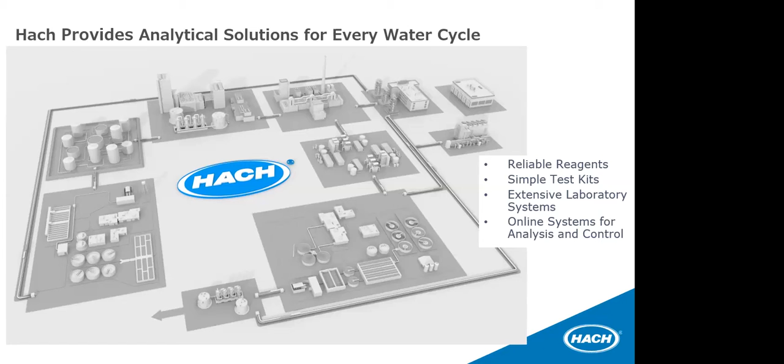A little background on Hach. Hach has been in business for well over 70 years, started by Clifford and Kitty Hach post-World War II, with very simple test kits that allowed anyone willing to read and follow instructions to reliably get accurate results in water quality measurement. Since then, Hach still has a huge line of test kits, as well as extensive laboratory systems and online systems for analysis and control. We work with really great distributors like Midland to help supply these products to our customers.

So we're talking about boiler water. The idea is scaling, and I show you a picture on the right of extreme scale. I think we've all seen examples of this at times. But anytime you start getting a buildup of scale in a system, you start getting a lot of problems with heat transfer, head losses, things like that. In extreme cases, you get complete failure. Basically, scale is the deposition of inorganic salts on boiler and heat exchanger surfaces, often like a calcium carbonate or calcium sulfate type scale forming.

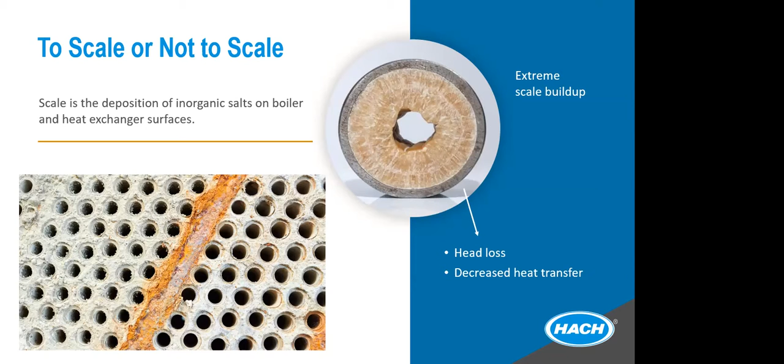Sometimes you get silicate-based scales. So the whole idea is how do you control that, because you're constantly bringing water into your boiler. It's always going to have a certain amount of dissolved solids to it, and as you heat that water and go through the cycles, you start cycling up the concentration of some of these dissolved solids. At some point, you start building up scale. So a lot of boiler management is really trying to reduce the effects of scaling, but also making sure you don't have corrosive conditions as well.

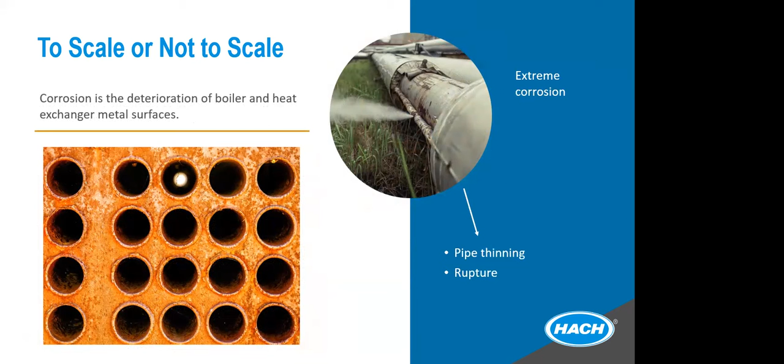So corrosion is the deterioration of the boiler and your heat exchanger metal surfaces. And extreme corrosion, as you get into higher pressure systems, can really be a dangerous thing. You get into pipe rupturing and all that. But by and large, corrosion can really start deteriorating your capital equipment and everything.

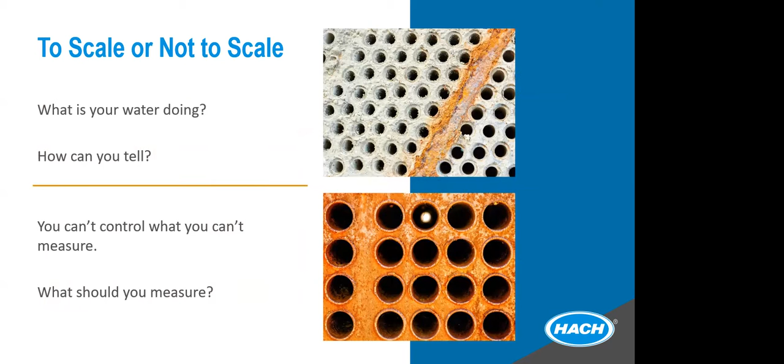So the question then is, what is your water quality? What is your water doing? And how can you tell? Well, basically, you can't really understand your water quality, and you can't control it unless you monitor it and measure it.

And to be able to do that, how do you do that measurement? What should you measure? Well, one of the biggest things we deal with in water quality, ubiquitous, is hardness and alkalinity. And those terms are somewhat ambiguous because they can mean different things at different times. But basically, from a standpoint of pure chemistry, hardness is the sum of the multivalent cations in solution. So if you looked at the total concentration of multivalent cations, with calcium and magnesium being far the most predominant, those are what are going to contribute to water hardness.

Alkalinity is basically the water solution's ability to neutralize acids. So in most natural waters that we deal with, by and large, a very high percentage of the alkalinity is bicarbonates, but it also can include carbonate and hydroxides. And then when you get into boiler water treatment, often we'll add phosphates, like trisodium phosphate, to enhance alkalinity.

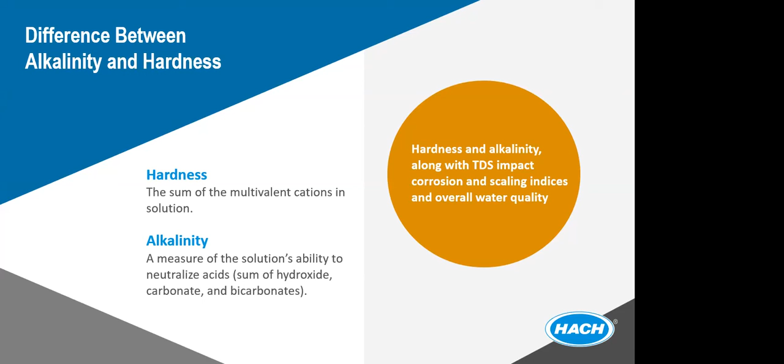But hardness and alkalinity, along with the TDS impact, total dissolved solids, will impact corrosion and your scaling indices and overall your water quality. So there are two things that are really, really closely watched in boiler systems.

Let's talk about hardness. As I mentioned, traditionally, hardness is the sum of calcium and magnesium in water. It also includes other multivalent cations, but by and large, a very high percentage in most waters is going to be calcium and magnesium. And largely, water is high in calcium and magnesium because when rain comes down from the sky, it's very pure. It hits the soils and dissolves the calcium and magnesium minerals in the soil, and they're dominant. They're more soluble than a lot of other things other than sodium chloride.

And so you start getting hardness building up in your water. We always express, pretty much in the industry, hardness as calcium carbonate. Even if it's magnesium or calcium, we express the result as milligrams per liter as calcium carbonate. We do that to get an idea of the equivalent hardness relative to the amount of alkalinity, which we also express in results of calcium carbonate.

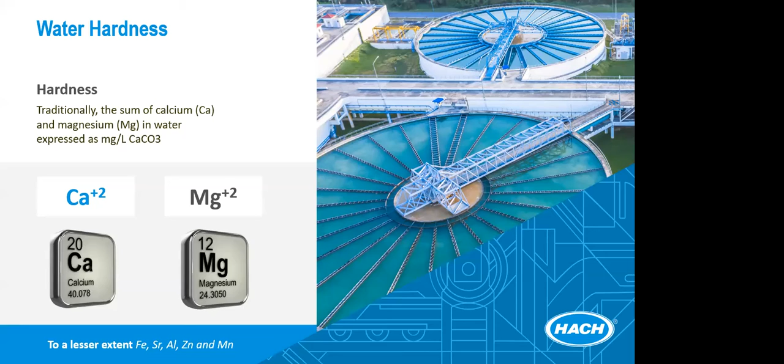Now, there's two types of hardness. And again, you need to understand why we get to this term here. There's temporary hardness, and this is hardness that results from carbonates and bicarbonates of calcium and magnesium. Permanent is what we call the non-carbonate calcium and magnesium. This would be calcium, magnesium sulfates, nitrates, and chlorides.

Now, this whole concept of temporary and permanent is really based upon an old method, and it's still a very viable method of reducing hardness, which we call lime softening. So in the case of lime softening for reduction of hardness, you basically will remove the calcium and magnesium carbonate-based hardness, but it will not remove your non-carbonate, like calcium and magnesium sulfates.

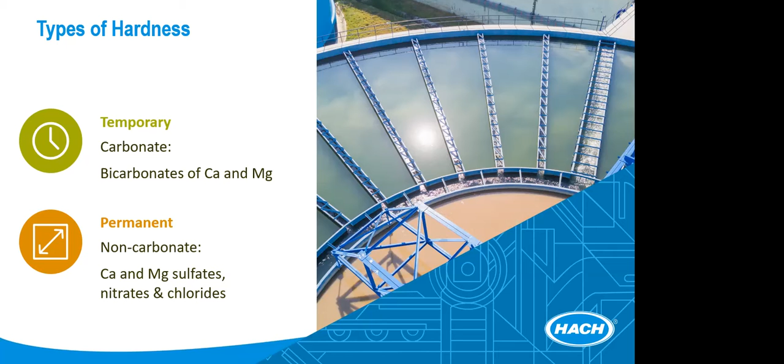That would require something like zeolite water softening, reverse osmosis, or demineralization. So the whole idea behind temporary hardness is that it can be removed with lime softening. Permanent hardness is that which would require other processes.

Levels of hardness really kind of depend on what you're talking about. The old general water hardness scale, and some places still do, measured hardness as grains per gallon. It takes 7,000 grains to make a pound; basically 1 grain, or 1 grain per gallon, is equivalent to 17 milligrams per liter.

So if you have a water that's measuring 100 parts per million as calcium carbonate, that would be considered moderately hard water. But again, that kind of depends upon a lot of things, because if you're in a situation where you have a very high pressure boiler, any hardness would be considered too hard for that type of situation. Medium pressure boilers or lower pressure, not so much.

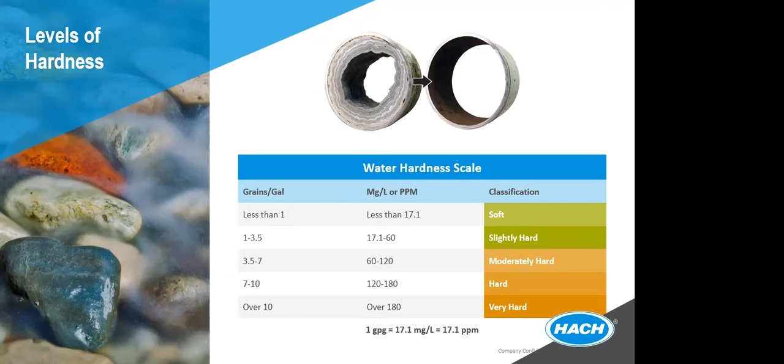So just understand that this water hardness scale is somewhat dependent upon how that water is going to be used.

Let's talk about alkalinity. Alkalinity is the capacity of the water to neutralize acids, often referred to as the buffering capacity. It really has to do largely with the presence of carbonate, bicarbonate, and hydroxide ions. In natural waters with pH in the slightly alkaline range, less than 8.5, pretty much all of that alkalinity is going to be bicarbonate.

But as you get into the more alkaline pHs, you can start getting a higher degree of carbonate because the hydrogen from the bicarbonate will dissociate off. And at pHs above 8.4 to 8.5, you also can start getting some presence of hydroxides. All of these together are considered to be the total alkalinity.

It's very important to have alkalinity in your water to counteract corrosion, but at the same time, understand that alkalinity along with your hardness can create scale. So there's a balance going on.

As I mentioned, in natural waters, the primary constituent of alkalinity is bicarbonate. But as the pH increases, the bicarbonate can dissociate to carbonate. And at higher pHs, you start getting the presence of the hydroxide ion. All of these will contribute to the total alkalinity.

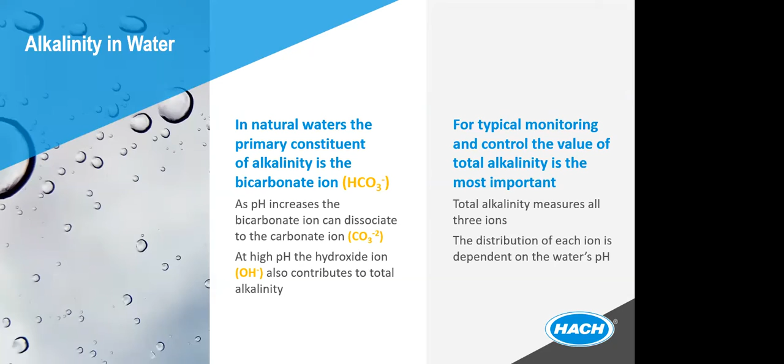So expressions of alkalinity are out there. We often look at M alkalinity, which is total. Essentially we take a water sample and add a normalized acid, usually sulfuric acid, until the pH reaches 4.5. At that point, the amount of titrant can be calculated back to the total alkalinity.

How do we know when we reach pH 4.5? It can be done with a pH probe in the water to show you the endpoint. There are also color indicators like bromocresol green or methyl red that would give you a rose-colored color at the point where you reach 4.5.

P alkalinity is the amount of acid it took to reduce the pH to 8.3. If you use phenolphthalein, it would go from pink to clear, and that would be your endpoint. Then your hydroxide free alkalinity, you look at 2 times your P alkalinity minus your total to help you calculate.

So based on your titrations, you can actually start speciating how much of your alkalinity is total versus P alkalinity, the hydroxide, and so forth.

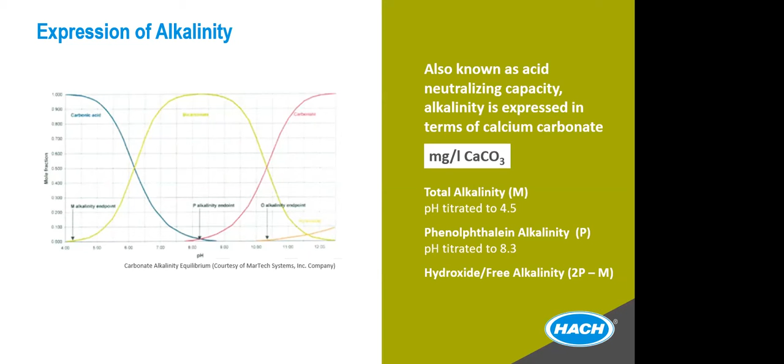I mentioned this earlier, and it really depends on your pressures or your boilers, how much hardness and alkalinity you can handle. For example, if you're dealing with a low pressure boiler, very often if your hardness is around 75 parts per million or less, that's probably going to be fairly tolerable. And the total alkalinity, you can handle alkalinity clear up to 900.

Now, if you're a power plant with supercritical pressures, you've got to be essentially zero in both of those. So again, hardness and alkalinity levels, and how you manage them, are really dependent often on boiler pressure. You have to understand what is an acceptable range based upon your water usage. High pressure boilers need very little to no alkalinity, while low pressure boilers would have a certain amount of hardness and alkalinity.

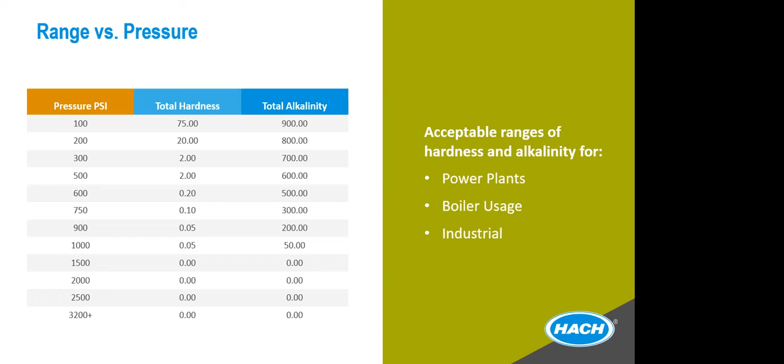So what do we do with hardness and alkalinity once we have the numbers? What can we predict? Well, there's long been what's known as the Langelier saturation index. The Langelier saturation index basically gives you an idea of whether or not your water has a tendency to either form scale in the boiler, be relatively balanced, or has a tendency to be corrosive. It's a combination of different measurements that includes hardness and alkalinity, but also includes temperature, total dissolved solids measured as conductivity, and pH.

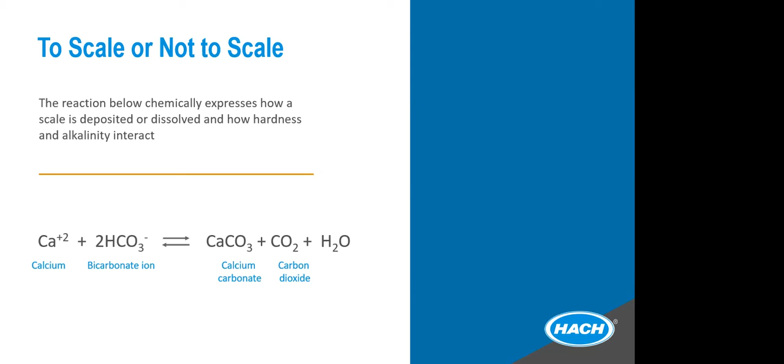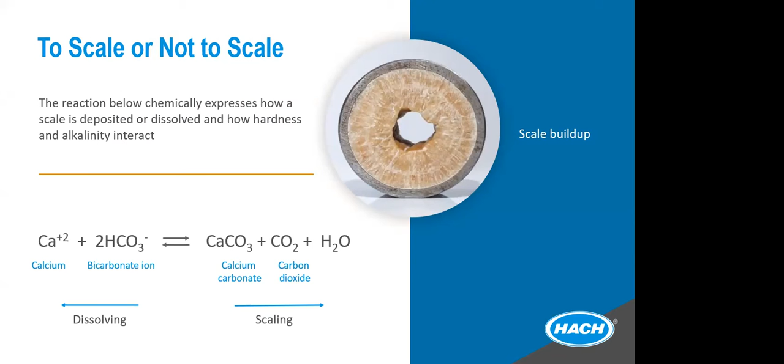But in all these situations, we're basically looking at this reaction I've got below here. We're looking at whether or not the water is dissolving or whether the water is scaling. If the water is dissolving, that could be a corrosive environment. If it's scaling, it's obviously going to be a scaling environment. So how do we balance this water for that?

And this is where the Langelier saturation index came in. Now, just as a matter of trivia, long before that, people actually took a piece of special marble and weighed it to a very accurate measurement. Then they would evaporate water on it, and see whether the evaporated water added to or detracted from the weight, to help determine whether that water was scaling or corrosive. Obviously, it was a pretty inaccurate way to do things. So the Langelier saturation index became the way we estimate the tendency of water to dissolve or deposit calcium carbonate on a pipe wall.

Now, that doesn't mean we want bare metal. Very often we'd actually like to have a thin layer of calcium carbonate as a protective layer, because that helps prevent direct contact of water to the metal, which in heated situations, as water becomes hot and under pressure, things like dissolved oxygen can really increase corrosion. So if you have a light shell or coating of hardness scale, that can actually help bring some protection. Very often getting a thin layer of calcium carbonate is desirable because it becomes a shield.

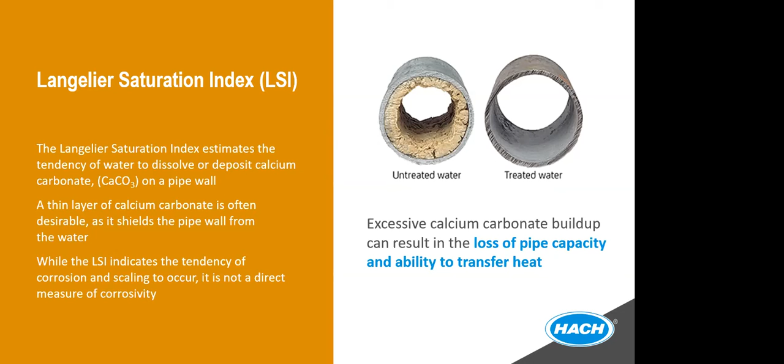So again, we use the Langelier saturation index, or LSI, to indicate the tendency of the water to corrode or scale, and try to have it slightly to the scaling side to help have a small thin protective shell at the same time, without getting excessive buildup.

As I mentioned earlier, you need to know several things, based upon the effect of pH on the solubility of calcium carbonate. That's what the Langelier saturation index is all about. When water is saturated with calcium carbonate, which can occur at a pH value called pH sat, or saturated pH, the water and calcium carbonate are at equilibrium, and the scale will neither be deposited nor dissolved. So if you look at the information here, the LSI is actually the pH of the water minus the saturated pH. So the whole key is, how do we determine what the saturated pH is?

But once we have that value, an LSI of 0 means the water is balanced, neither scaling nor dissolving. LSI greater than 0 means there's a tendency to form scale. LSI less than 0 means there's a tendency to dissolve calcium carbonate, and the water will be more corrosive.

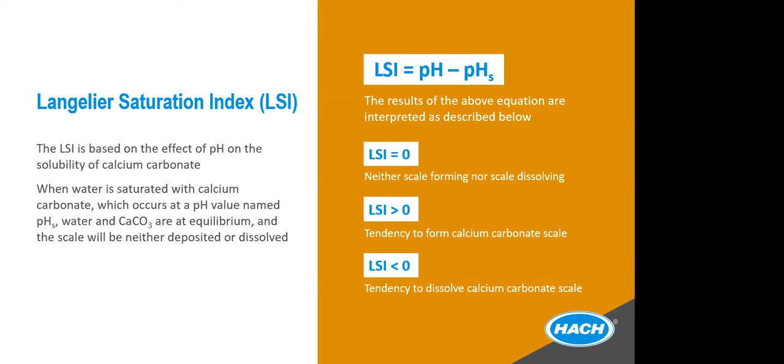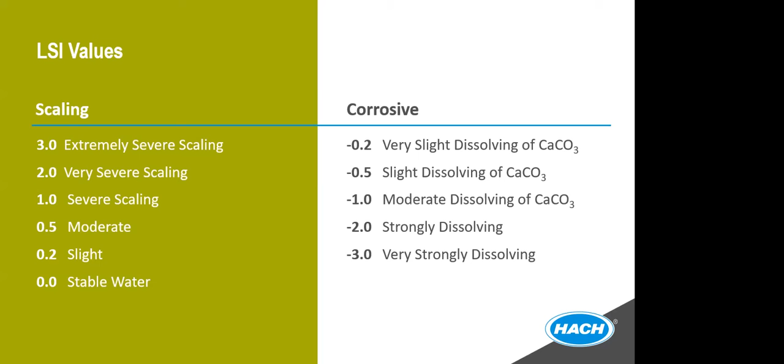So looking at values: 0 would be stable water, 0.2 slightly scaling, all the way up to 3, which would be extreme. If you had an LSI of 3, you've got an extremely severe scaling water. On the corrosive side it works the other way — a -3 would be a very strongly dissolving water and would be subject to corrosion.

Anyway, you measure total alkalinity by titration, you measure calcium hardness by titration, you get your temperature — usually your pH probe or TDS conductivity probe will give you the temperature, but you measure it directly. You measure your TDS using conductivity and then extrapolate TDS, and of course your pH from the pH meter. And then based on those particular values, you calculate the Langelier saturation index.

I mentioned earlier a bit about permanent and temporary hardness. When looking at methods for softening water, that's really the target you're looking for. For example, I earlier mentioned lime softening — there are different types. There's cold lime softening, which just uses ambient temperatures, and there's also hot lime softening, where you use excess heat from a plant to actually create more precipitation.

Essentially, lime softening is adding an excess amount of lime to our process, which then precipitates the hardness out of the water. This can do a good job on high volumes of water to reduce hardness, and usually this is satisfactory for low and medium pressure boilers, because with cold lime softening you can typically get your hardness down to 30 to 50 parts per million, which is often good enough for medium and low pressure boilers.

But as you need more reduction of hardness, you might go with hot lime softening, which can reduce more. Very often, though, you may go with what's called zeolite softening, which is a type of anion or cation exchange. Basically, it's exchanging sodium for calcium in your water.

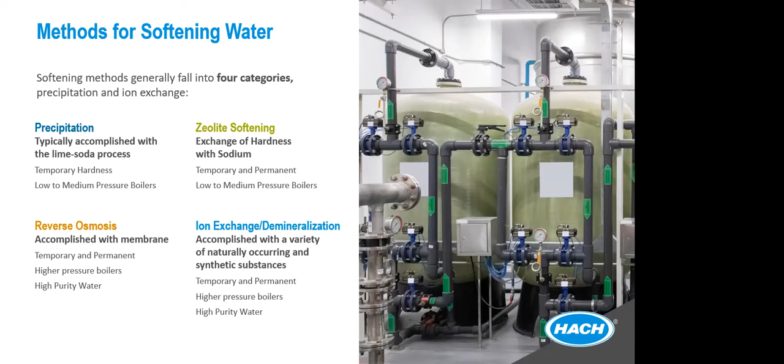This is often used in higher pressure boilers for high purity water, but even more important, as a precursor to ion exchange. You would use reverse osmosis to supply ion exchange demineralization, which really purifies your water down to ultra pure levels. So when you really need ultra pure water, most power plants will go through reverse osmosis and then go through ion exchange demineralization so that their water is near that 18 megohm purity.

So these are the ways of softening. First, precipitation lime softening, again - a lot of places use that when the water doesn't have to be absolutely devoid of hardness. It handles very high volumes and can be done quickly. It's not as expensive as some other methods, and for the volume of water you're using, it can usually reduce hardness down to 30 to 50 parts per million.

One of the biggest uses of water in the world, if not the biggest use other than irrigation, is cooling water. Very often this water is too high in hardness, so it may go through lime softening first. When you need a little more water volume, hot lime softening can be done, which gives better purity. That's done in some cases, and we'll add magnesium to help precipitate out silica.

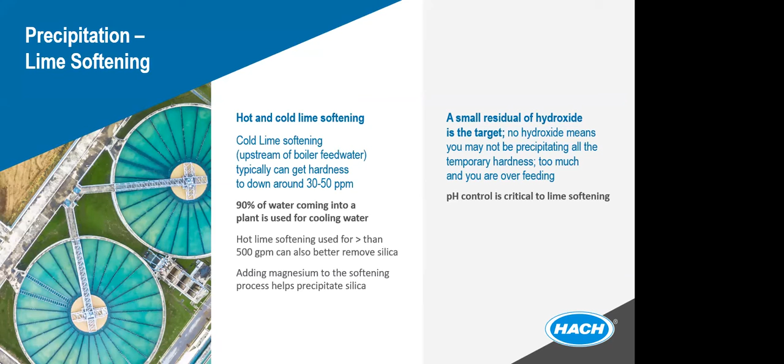In this situation, when you're doing lime softening, you always want to make sure you have a residual hydroxide, because as long as you have some hydroxide, you're still going to be precipitating available hardness. If you have no hydroxide, you're not going to be precipitating. So pH control is very critical at this point - understanding your hydroxide levels and alkalinity levels becomes very important in this process.

Zeolite softening, again, is water passing through a bed of zeolite material, exchanging the sodium for the hardness, removing calcium and magnesium ions, both temporary and permanent. This is used in situations where your water volumes are not near what's needed for cooling water - usually less than 500 gallons a minute. Very often we feed boiler water with lime softening too. Hardness can be reduced to less than 2 milligrams per liter, and in some cases I've seen zeolite softening remove hardness down to less than 0.5.

Now understand that zeolite softening does not reduce your conductivity. In fact, you actually get a little bit of a spike of conductivity because you're replacing calcium magnesium with an equivalent amount of sodium. So you're not really reducing the TDS of the water. You're reducing the hardness, but you're giving that back with sodium.

What's really important is understanding when your zeolite resin is exhausted, when there's no longer any sodium on the resin to exchange, and being able to measure that with a hardness titration to understand if you're starting to see hardness come through your zeolite softener. Now you know it's time to regenerate that softener. So again, being able to measure and monitor.

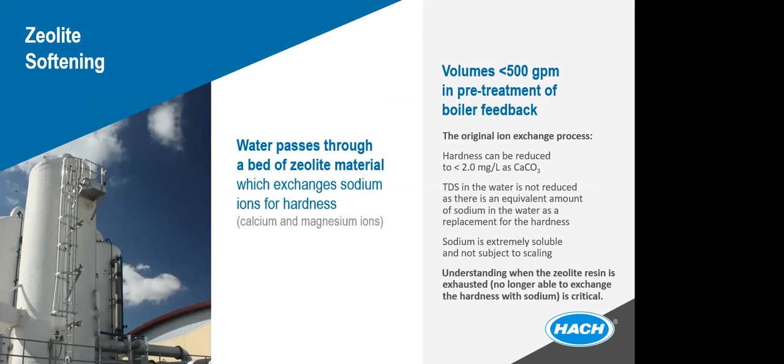So solutions. How do we do all this? What's out there? The first test that Clifford Hach ever released to the water world was a test for hardness. It was a drop count test where every drop of titrant you added to a sample of water until it turned a color equaled 1 grain per gallon. That was the original test. He actually started the company with that, he and his wife Kitty, and they built from that. Hach still sells that simple test kit from that time. But there are also many more sophisticated ways of doing this.

So what are some of the solutions that Hach and Midland offer for the Langelier saturation index?

This is a great little instrument here, called the TitraLab AT1000 auto titrator. What this does is you simply go get your water sample. For a nice pretty picture, they've got the solutions all colored. But if you look at the titrator, there's a beaker of water - in that situation, it would be your water sample at known volume - and putting this on there and pushing a few buttons, it's going to first titrate that water to a pH of 4.5 and get your alkalinity.

It will keep track of what the P alkalinity was. It can keep track of the total alkalinity. At the same time, it's going to be initially measuring the pH of that water and the temperature. And then after that, it's going to titrate for the hardness. So now you've got your alkalinity, hardness, pH, and temperature. You've got 4 of the 5 parameters you need for the Langelier saturation index.

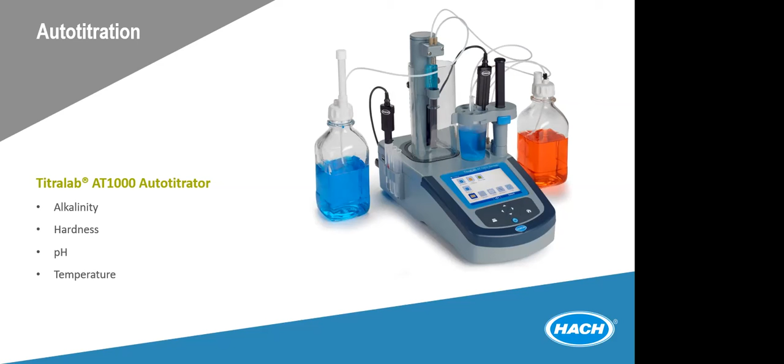So how do we go about measuring pH and conductivity? Well, the AT1000 has a built-in pH meter, but you still are going to need the electrodes. But also in some cases where you may be doing separate titrations, we have what we call the Hach HQ meters. One meter will measure your conductivity and your pH, and then you use your choice of pH probes based upon the type of sample you have, and conductivity.

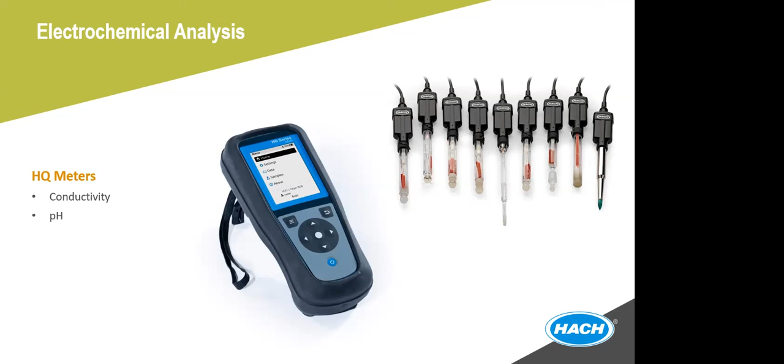But going back to the AT1000s, the auto titration really makes it simple because you're not dependent upon how well someone can read a burette. The fact that we provide the reagents already calibrated and standardized for you means you're going to get a lot more accurate, repeatable results, and it can improve lab safety for you and automatically calculate the Langelier saturation index.

I apologize for the background noise. I'm in a motel room and they're actually doing construction right outside my window. So I apologize for the background noise.

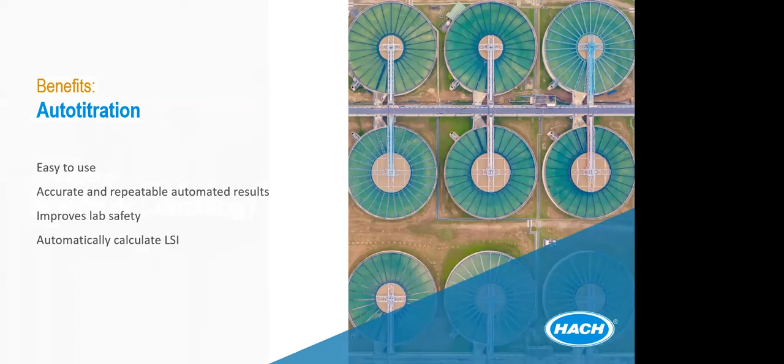So let's look at some examples of scaling or corrosion. In the case of plant operators performing analysis once a day, they might be looking at the alkalinity. They would look at the hardness, both total and calcium, and also additional water parameters. And then they make their process changes based upon that data.

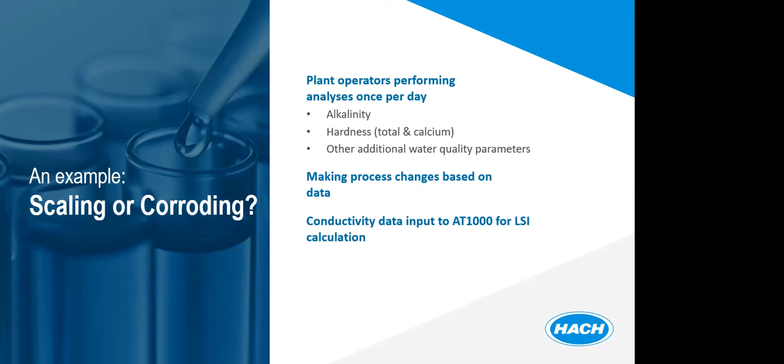So the monitoring solutions we're talking about here, like the AT1000 titrator, again measure hardness, alkalinity, pH, and temperature, and then a separate conductivity measurement for that. From that, you get your automatic calculation. Then you can make adjustments on your plant water as you see how you need to adjust your LSI - is more pH needed, is more alkalinity needed, etc.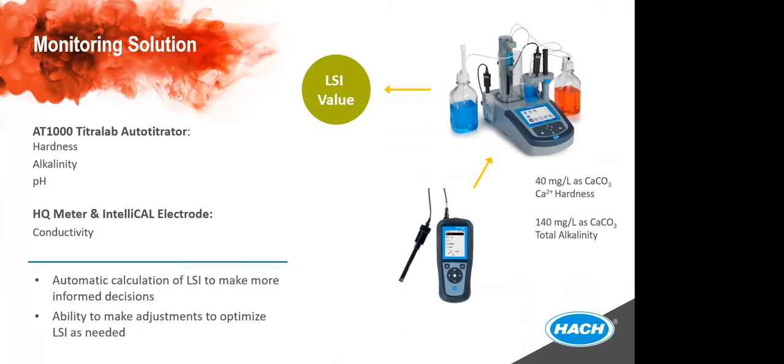So some rapid key takeaways. I'm going to interrupt here real quick. We had a question come through that probably makes sense to ask right here. Somebody asked if Hach offers any continuous online hardness analyzers.

Yes, we do. We offer several. If we go back to lime softening, and zeolite softening, we talked about the need to watch for regenerating your zeolite softener. We have what's called a hardness monitor, and basically that allows you to have trip points. So you say, I want to know when my hardness breaking through is greater than 5 parts per million, and it would actually alarm whenever the water quality became that high. It would also trigger a relay to start the regeneration process.

We also have online process instrumentation that can directly measure alkalinity and hardness, just like you would in the lab. And if you have one of these that does hardness, alkalinity, pH, with some controllers you can actually have that calculate the LSI as well. So yes, we have online instrumentation that will do hardness and alkalinity, and there are even some algorithms to calculate online what your LSI would be. It's a great question. Hach measures alkalinity all the way from the simple drop count test kits we developed 70 years ago to very sophisticated online instrumentation.

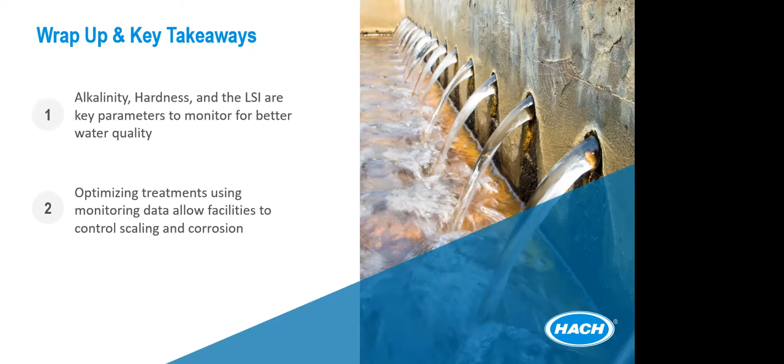Are there any questions here? Another question I had is, what is the best treatment for corrosive water?

Yeah, as much as anything, it's pH control. A lot of times corrosive water is really often condensate coming back or something along that line, and pH control could mean adding some alkalinity back into the water. It may be a caustic type treatment, a small amount of caustic, or in some cases the addition of some lime. Basically, the water's corrosive because it doesn't have enough alkalinity, so you're just trying to get that alkalinity back into the water. Different kinds of processes demand different things, but depending on your boiler, sometimes you don't get into a sodium hydroxide feed or things like that. It's a good question.

Any other questions? And then, are hardness and alkalinity always equal? That's a great question. A lot of people think it is.

There are many cases - if we go back to the raindrop, and we track that raindrop as it hits the soil and dissolves calcium carbonate, then your amount of calcium and your amount of carbonate would be equivalent. There are a lot of waters out there where there's been very little geologic situations where there's calcium sulfates, gypsum and all that, maybe from past volcanoes or igneous activity. If that water has largely been influenced by calcium carbonate or magnesium carbonate dissolving, then very often the two can be very close together.